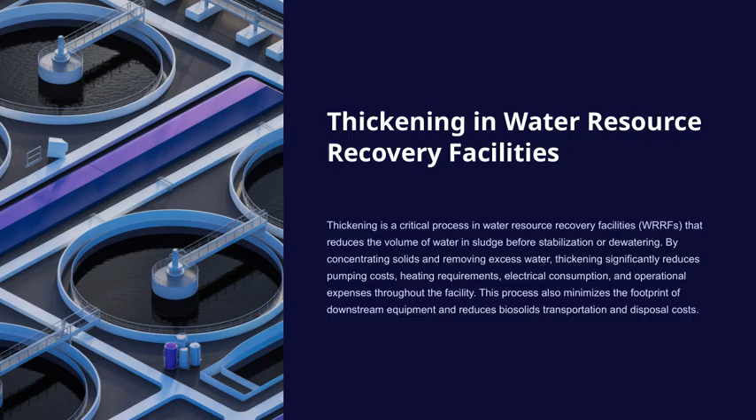So let's get started. Let's talk about why thickening really matters in our processes. First, when we increase the solids content in sludge from 2% to 8%, we can reduce the overall sludge volume by about 75%. This is a huge difference, and it translates directly into lower operational costs. You'll see savings across many parts of the facility, including heating, pumping, and chemical treatment systems.

Now, on the process efficiency side, thickening helps us by reducing the water content before downstream steps like anaerobic digestion. With less water to handle, we need smaller equipment and less energy to operate it. This not only makes our facilities more sustainable, but also more cost-effective in the long run. So overall, thickening is a key step that impacts both costs and efficiency, helping us optimize our operations while supporting our sustainability goals.

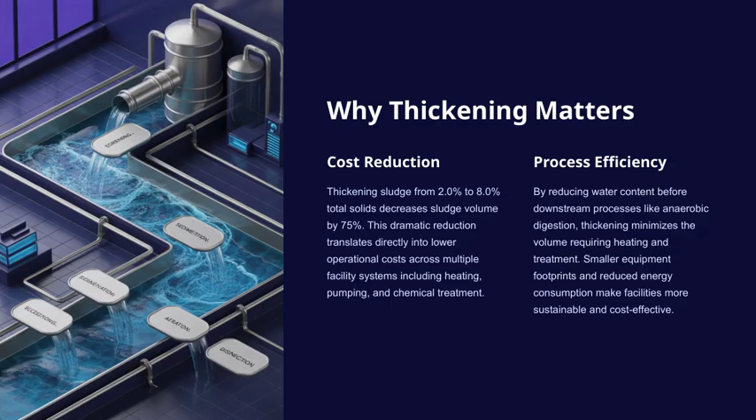Now, let's take a closer look at the different thickening technologies available and how they fit into the overall sludge management process. First up, we have gravity thickeners. These rely on a simple physical settling process, and they can typically achieve total solids concentrations of about 2 to 15%. They're particularly effective for primary sludge and lime-conditioned solids. One of the key advantages here is their straightforward operation and lower cost, though they do require a larger footprint compared to some other options.

Next, we have dissolved air flotation, or DAF. This technology uses tiny air bubbles to float solids to the surface, reaching about 3.5 to 8% total solids. It's especially good for waste-activated sludge and aerobically digested solids because of its excellent capture rates. The ability to separate solids efficiently makes it a popular choice in many treatment plants.

Moving on, there's the gravity belt thickener. This process uses a polymer conditioning step, and the sludge drains through a porous belt, achieving total solids levels between 4 and 10%. It's known for its compact design, making it suitable for space-constrained facilities, and it offers high reliability with capture rates exceeding 95%.

Then we have rotary drum thickeners. These feature a rotating perforated drum with internal flights, which helps concentrate solids to about 5 to 12% total solids. They are quite space-efficient and are ideal for waste-activated sludge, especially when lower energy consumption is a priority.

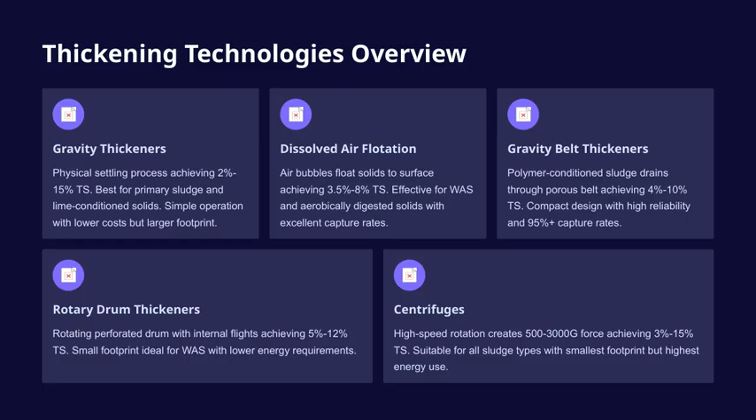In summary, understanding these different thickening options helps us choose the right technology based on space, cost, energy use, and the specific sludge characteristics we're dealing with, an essential part of designing an efficient and effective treatment process.

Gravity thickeners are actually one of the oldest and simplest technologies we use for thickening sludge. They come in circular or rectangular shapes and work similarly to clarifiers. Essentially, solids naturally settle to the bottom of these tanks, while the clearer water, or supernatant, flows over weirs at the top. Now, how do they operate?

Sludge enters through a central feed well, which is designed to distribute the flow evenly and reduce turbulence. This even distribution is key to efficient settling. Inside the tank, solids settle by gravity onto a sloped floor, typically with a pitch between 2 to 3 to 12. As the sludge collects, slow-moving scrapers or plows gently push it toward a central hopper. From there, the sludge is pumped out for further treatment.

An important feature is the collector mechanism, which has pickets that gently agitate the sludge blanket. This helps release any trapped gas bubbles, which could otherwise cause bulking and disrupt the process. For primary sludge, the thickening typically results in a solids concentration of about 5 to 10% total solids. When we combine primary and secondary sludge, the concentration tends to be lower, but still effective for our purposes.

Let's touch on some key design parameters. These tanks usually have a depth of about 3 to 4 meters, or around 10 to 13 feet. The diameter can be quite large, up to 25 meters, about 82 feet, especially for bigger plants.

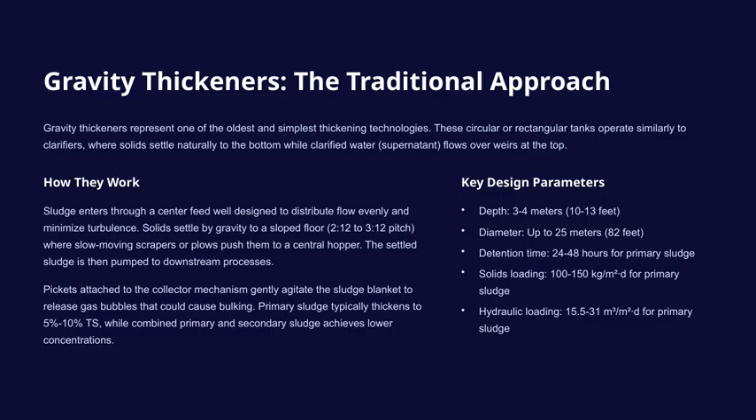All these parameters help ensure the thickener operates efficiently, producing a sludge that's thick enough for downstream processes, while maintaining stable and reliable operation. Let's take a closer look at the factors that influence the performance of gravity thickeners.

First, sludge characteristics are really important. Fresh primary sludge tends to thicken more effectively than aged or combined sludges. The key here is the nature and freshness of the solids, which significantly impact how quickly they settle and the final concentration we can achieve.

Next, temperature effects play a crucial role. When temperatures are higher, there's a greater risk of septic conditions and odors developing. On the other hand, lower temperatures increase water viscosity, which slows down the settling velocities and means we need longer detention times to get the desired thickening.

Now let's talk about loading rates. It's critical to maintain the design solids and hydraulic loading rates. Overloading the system can lead to rapid sludge buildup, potential septic conditions, and carryover of solids into the supernatant, which we definitely want to avoid.

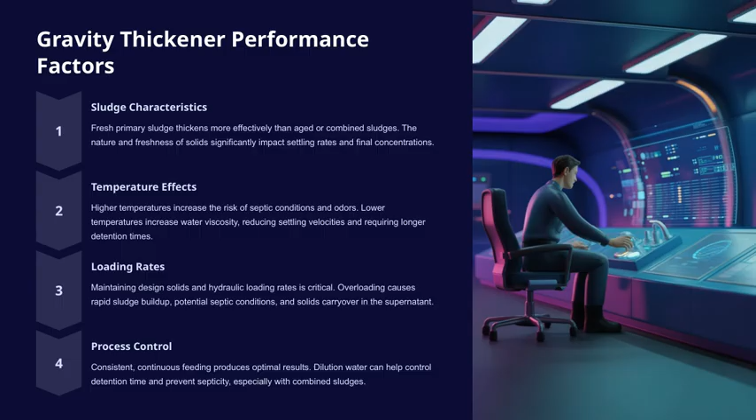Finally, process control is key. Consistent, continuous feeding helps us achieve optimal results. Sometimes, using dilution water can be beneficial. It helps control detention time and prevent septicity, especially when working with combined sludges. All these factors are interconnected and essential for maximizing the efficiency and effectiveness of our gravity thickeners.

Now let's look at how dissolved air flotation thickeners, or DAFTs, operate. Essentially, they use compressed air to change the specific gravity of solids, making them float to the surface.

The process begins by dissolving air into recycled water under pressure, typically between 40 and 80 psi, in a saturation tank. When this pressurized mixture enters the DAFT at atmospheric pressure, tiny bubbles, less than 100 micrometers in size, are released and attach themselves to the solid's particles.

This attachment causes the solids to become buoyant and float to the surface, forming a layer that's usually about 200 to 610 millimeters deep. That float layer is then skimmed off the top. Meanwhile, the heavier solids settle to the bottom and are removed as underflow. Both of these streams are collected and removed by conveyors.

Looking at performance characteristics, the float solids typically contain about 3.5 to 4% total solids, while the underflow solids range from 3 to 8%. The recycle rate can be quite high, between 100 and 200% of the influent flow, which helps maintain efficiency. Without using polymers, the capture rate of solids is around 95%, which is quite effective.

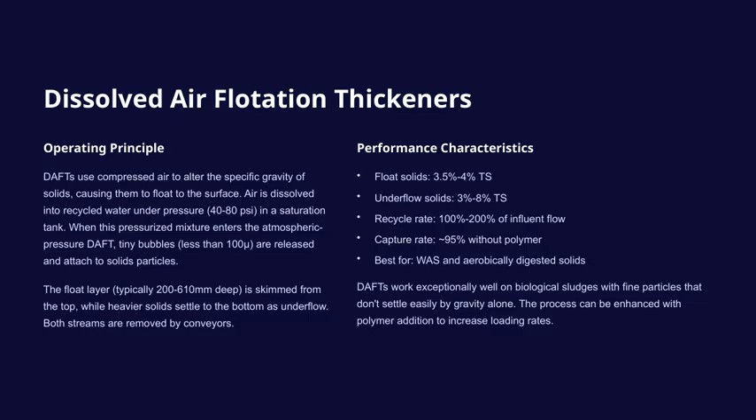DAFTs are particularly well suited for thickening waste-activated sludge and aerobically digested solids. They excel at handling biological sludges with very fine particles that don't settle easily through gravity alone. And of course, the process can be enhanced further by adding polymers, which increase the loading rates and improve overall performance. So, in the context of our overall treatment process, DAFTs offer a reliable, efficient method for thickening biological sludge, especially when dealing with fine particles that are challenging to settle naturally.

Now, let's look at how the DAFT operation and control work. First, air saturation occurs in the saturation tank, where compressed air dissolves into the recirculation water at pressures between 40 and 80 psi. Achieving the right pressure is crucial because it creates optimal bubble sizes, which are essential for effective flotation.

Next is bubble formation. When this pressurized water enters the atmospheric part of the DAFT, the pressure drops and tiny bubbles form. The size of these bubbles, ideally around 50 micrometers, is a key factor because it influences how well solids can attach and be floated.

Moving on to solids flotation, these tiny bubbles attach themselves to solids particles, reducing their overall density below 1. This causes the particles to rise to the surface, forming a float that can easily be removed.

Then we come to collection. The float at the surface is removed by top skimmers, while bottom scrapers collect any settled solids. The clearer water, or subnatant, is then returned to the headworks of the facility for further treatment or reuse.

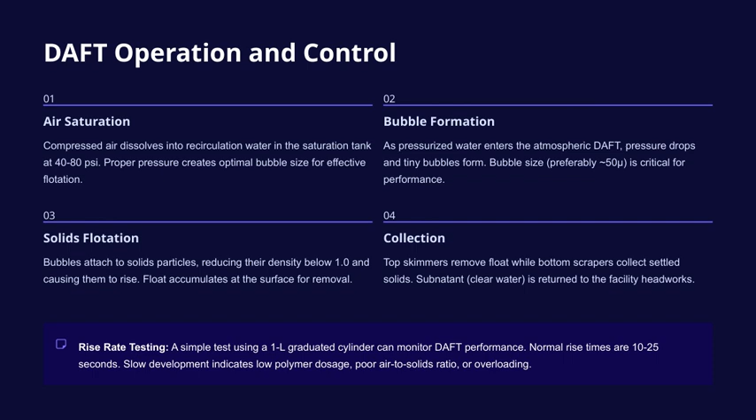Finally, there's a simple rise rate test using a 1-liter graduated cylinder. This test helps us monitor how well the DAFT is performing. Normally, rise times should be between 10 and 25 seconds. If the rise is slow, it might indicate issues like low polymer dosage, an improper air-to-solids ratio, or overloading the system. Keeping these parameters in check ensures optimal operation and treatment efficiency.

Gravity belt thickeners, or GBTs, are a real game changer in thickening technology. They are designed to be compact yet highly efficient, making them ideal for space-constrained setups. These units work by removing free water from polymer-conditioned sludge as it moves across a porous, moving belt, which is quite innovative.

Now, let's walk through the process flow. First, polymer is injected into the sludge feed line through a high-energy mixing zone, usually using an inline variable orifice mixer. This ensures thorough mixing and proper conditioning of the sludge.

Next, the conditioned sludge flows into a flocculation tank, where it stays for about a minute. This detention time allows for proper floc formation, which is critical for effective thickening. From there, the sludge overflows onto the moving belt.

As it travels, chicanes or plows gently turn the sludge, encouraging trapped water to drain through the clear sections of the porous belt. At the discharge end, there's an adjustable ramp that provides extra dewatering time, making the process even more efficient.

Looking at the key components, you'll notice the flocculation tank with a slow-speed mixer, which helps with floc formation. The porous woven polyester belt is central to the process, allowing water to drain through it. Chicanes facilitate gentle agitation, preventing sludge breakup.

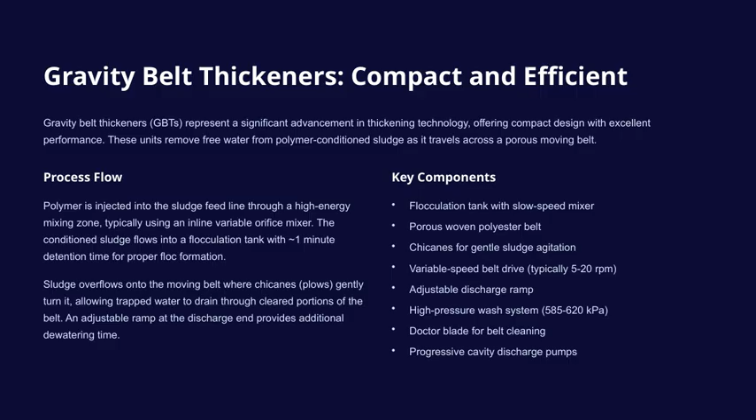Let's take a closer look at GBT performance and the control variables that influence it. First, polymer conditioning is absolutely critical. The type of polymer you choose and the dosage you apply can make a big difference.

For example, doses typically range from about 1.5 grams per kilogram, which is roughly 3 pounds per dry ton, for raw primary sludge, up to 6 grams per kilogram, or around 12 pounds per dry ton, for sludge that has been anaerobically digested. To determine the best polymer type and dosage, proper jar testing is essential. This helps us find the optimal conditions for effective flocculation.

Next, let's talk about mixing energy. The inline mixer creates turbulence that disperses the polymer evenly throughout the sludge. The key here is adjusting the orifice opening to control the mixing intensity. If the mixing is too gentle, we risk poor floc formation. If it's too aggressive, we might shear the polymer chains, reducing their effectiveness. Balancing this is crucial for optimal results.

Moving on to belt speed, slower speeds increase the retention time, which allows for better thickening of the solids. They also help concentrate the solids more effectively. But if we speed up the belt, we increase throughput, which is good for productivity. However, faster speeds can sometimes reduce the dryness of the final cake, so operators need to find that sweet spot, balancing speed with feed rate to achieve the best performance.

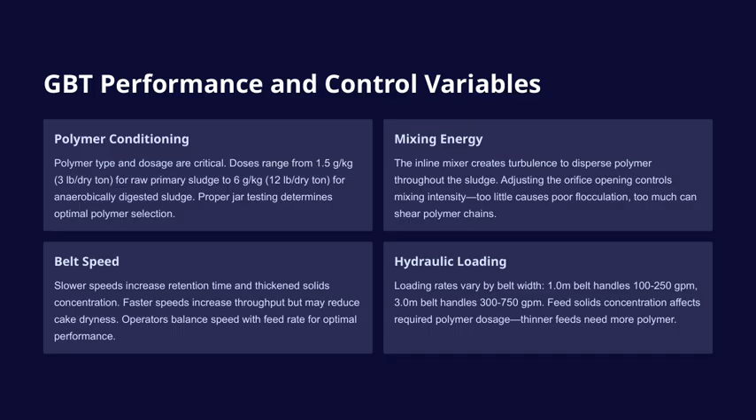All these variables, polymer conditioning, mixing energy, belt speed, and hydraulic loading, are interconnected. Managing them carefully helps us optimize the GBT process, ensuring efficient operation and high-quality outputs.

Let's talk about the GBT solids loading and capture rates. When it comes to loading, we typically see a minimum of around a few kilograms per meter per hour, and the maximum can go quite a bit higher depending on the operation. Now, what's really impressive is that GBTs consistently achieve solids capture rates of over 95% when they are properly operated. That's a key point because it highlights the efficiency of this technology.

The concentration of thickened sludge usually falls between 4% and 10% total solids, or TS. Meanwhile, the feed solids, meaning the solids going into the system, range from about 0.4% up to 8% TS. This variation is important because it affects how well the system performs. Performance, of course, depends on several factors. The characteristics of the sludge itself play a role, as does the effectiveness of the polymers used.

Operational adjustments, things like belt speed, ramp angle, and mixing energy, are critical for optimizing the process. Connecting this to our overall theme, understanding these loading and capture rates helps us optimize systems for maximum efficiency, ensuring we meet our treatment goals effectively and reliably.

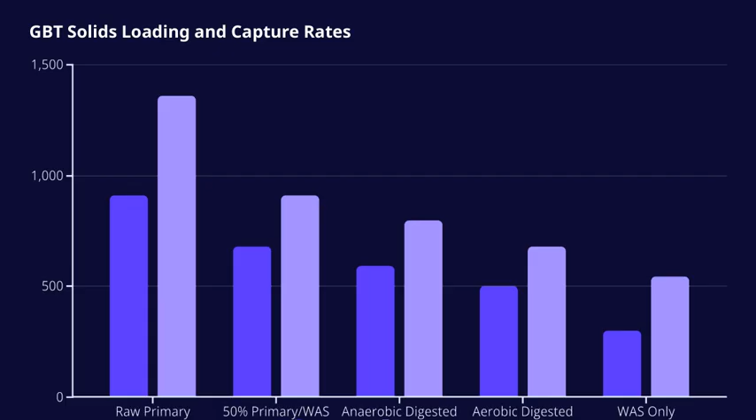Let's take a closer look at rotary drum thickeners and their compact design. These units are a great space-saving option for sludge thickening, especially when dealing with waste-activated sludge, or WAS. The key feature is the rotating perforated drum, which typically spins between 5 and 20 revolutions per minute. Inside, you'll find internal flights or screw conveyors that work to move the conditioned sludge along the length of the drum. Now, how does it operate?

Polymer-conditioned sludge is fed into a flocculation tank just before reaching the drum. The rotating drum then lifts the sludge up along its sides. When the sludge reaches the top, it falls back down, and during this process, free water is able to drain through the perforations into a collection trough beneath. Meanwhile, the internal flights are constantly pushing the sludge towards the discharge end, ensuring continuous movement.

Looking at performance specs, these units can handle feed capacities of up to 180 cubic meters per day for larger models. They typically produce a thickened solids concentration ranging from 5 to 12% total solids, and for WAS, the feed concentration is usually between 0.5 and 1% TS. The capture rate is quite high, between 93 and 99%, meaning most of the solids are retained. The polymer dose varies from 2 to 7 grams per kilogram, depending on the sludge type, and the drums are made from durable materials like stainless steel wedgewire, perforated plates, or polyester fabric.

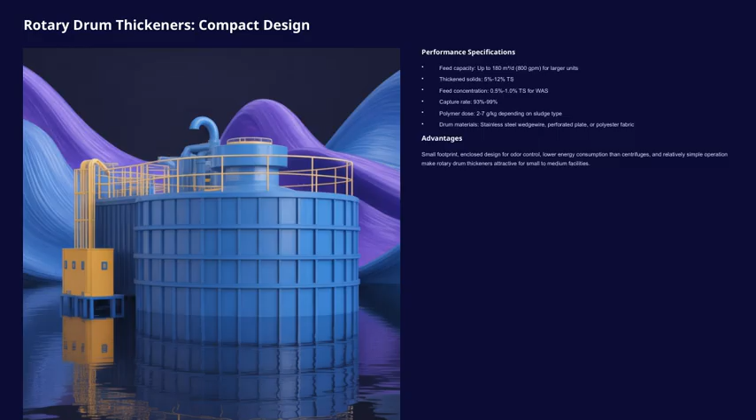Now, let's talk about centrifuge thickening and the maximum force it can generate. Centrifuges use rotational acceleration to create incredibly high forces, ranging from 500 to 3,000 times Earth's gravity. This intense force dramatically speeds up the separation process, allowing solids to be separated from water very efficiently. Typically, these machines operate at speeds between 1,000 and 3,000 RPM, which enables them to thicken all types of sludge to concentrations between 3 and 15% total solids.

Next, let's look at how the feed enters the centrifuge. Conditioned sludge is introduced through a stationary feed tube into the center of a rotating bowl via an inlet distributor. This setup ensures a smooth and controlled entry, setting the stage for effective separation. Once inside, the high-speed rotation causes the denser solids to be pushed outward toward the bowl wall, while the lighter water remains closer to the center. This centrifugal force creates a rapid and clear separation of solids from water.

Moving on to solids conveyance, there's a scroll conveyor inside the bowl. It rotates slightly slower than the bowl itself and scrapes or conveys the solids from the wall toward the discharge end, which is conical in shape. This movement ensures the solids are effectively moved out of the separation zone. Finally, the clarified water flows over adjustable weirs at the opposite end of the centrifuge. By adjusting the weir height, we can control the pond depth and, consequently, the amount of water discharged. This entire process highlights how centrifuges efficiently separate solids from water, contributing to effective sludge management.

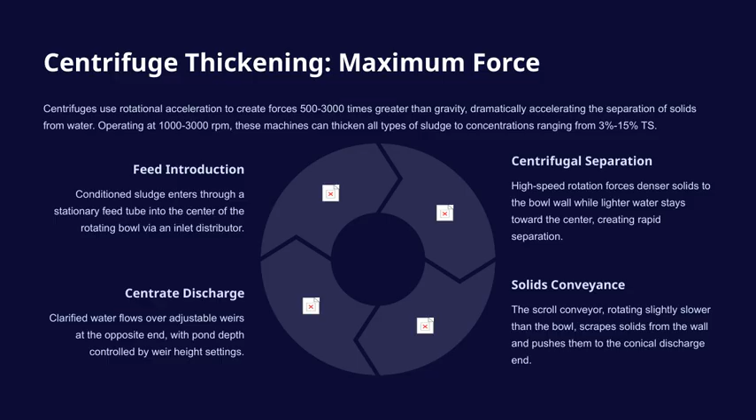Let's take a closer look at the centrifuge process variables that are crucial for optimal operation. First up is bowl speed. This is set during commissioning, and it determines the G-force applied during separation. Higher speeds generate more force, which can enhance solid separation, but it may also reduce the dryness of the resulting cake. Typically, we're looking at speeds between 2,000 and 3,000 RPM, which produce G-forces ranging from about 500 to 3,000.

Next, we have differential speed, which is the difference in RPM between the bowl and the scroll. This setting controls how long solids stay in the centrifuge. Longer retention times usually mean a drier cake, so lower differential speeds, say between 1 and 20 RPM, give us that longer retention. Conversely, higher differential speeds make the solids discharge faster, which results in a wetter cake but can improve throughput. Then there's pond depth, which is managed through the weir height. Pond depth influences the size of the clarification zone and the quality of the centrate.

A deeper pond generally helps improve the clarity of the centrate, but it can also lead to a wetter cake, so there's a balance to strike here.

Moving on to the target thickened solids, we usually aim for about 5 to 6% concentration. This level ensures we maintain pumpability for downstream processes, which is critical for smooth operation.

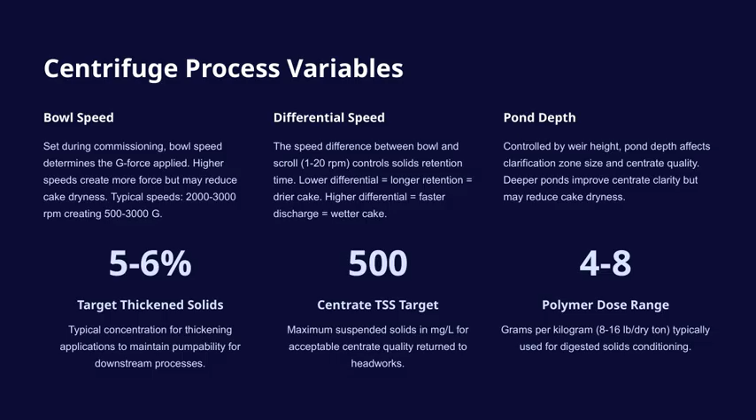Polymers are key conditioning chemicals that play a crucial role in improving both thickening and dewatering processes. They do this by making solids particles coagulate and form larger, more manageable flocs. These large molecules, which have high molecular weights, act as both coagulants, which destabilize colloidal suspensions, and flocculants, which bridge particles together into bigger masses that are easier to separate from water.

Now, why do polymers work so well? Wastewater sludge particles, especially in waste-activated sludge, carry negative electrical charges. These charges cause the particles to repel each other, keeping them suspended and stable.

Cationic, or positively charged, polymers come into play here. They neutralize these negative charges, allowing the particles to come closer together. Once neutralized, the long polymer chains can bridge between particles, helping form large flocs that settle or separate more easily from the water.

It's important to note that primary sludge has weaker negative charges and tends to settle more readily, so it often requires less or no polymer. In contrast, waste-activated sludge has stronger negative charges and smaller particles, making the use of polymers essential for effective thickening and dewatering.

Let's also talk about some key characteristics of polymers. They can carry different charges: cationic, anionic, or non-ionic, depending on their application. The charge density indicates how many charged sites are along the polymer chain, which affects how well it interacts with sludge particles.

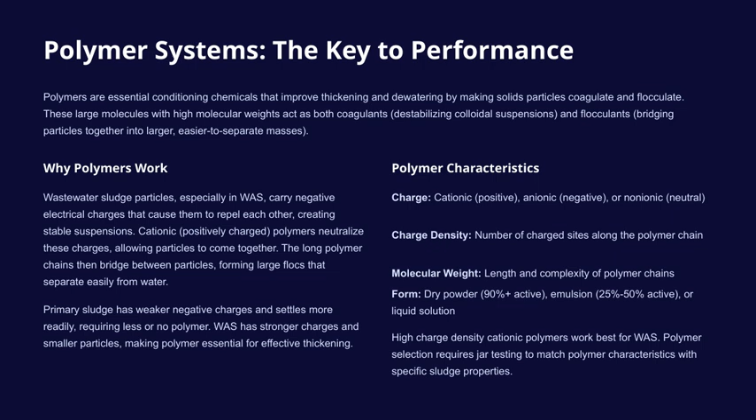For waste-activated sludge, high-charge density cationic polymers tend to be the most effective. And of course, selecting the right polymer involves jar testing. This is where we match the polymer characteristics with the specific properties of the sludge to ensure optimal performance.

Let's take a closer look at dry polymer systems. First, we have the dry polymer feed. This involves volumetric feeders such as screws, augers, vibrating units, or discs that sprinkle individual polymer grains into the wetting zone at carefully controlled rates. Proper calibration here is crucial because it ensures accurate dosing, which is essential for maintaining consistent polymer performance.

Next is the initial wetting stage. This is a critical step because each particle must be fully wetted to prevent issues downstream. Washdown water creates a smooth flow over the funnel surfaces, immediately transporting these particles into the mixing zone. Ensuring thorough wetting at this stage helps avoid problems later on.

Then we move into high-energy mixing. Eductors use water pressure, typically between 200 and 400 kilopascals, to generate a high-velocity flow. They leverage the Venturi effect, providing intense mixing that saturates the polymer particles and begins the process of uncoiling the polymer chains. This step is vital for activating the polymer effectively.

Following that, we have the aging tank. Here, the mixture is gently mechanically stirred at speeds up to 500 RPM for anywhere from 30 minutes to 2 hours. This allows complete polymer activation, and proper aging ensures that the polymer is fully ready for use, maximizing its effectiveness in the process.

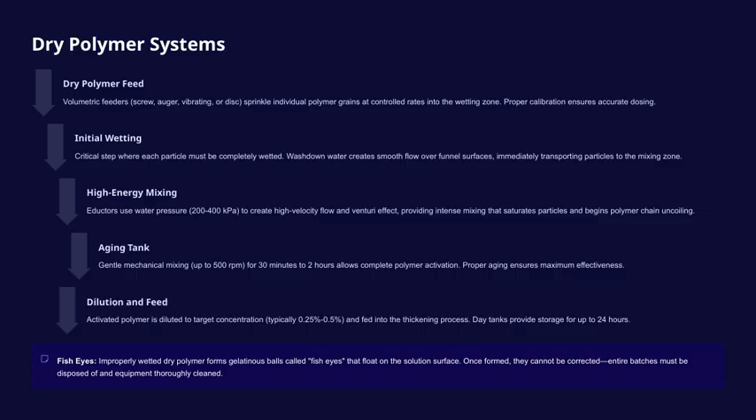Let's take a closer look at emulsion polymer systems and how they work. These systems inject neat polymer, typically between 25 and 50% active content, into a high-velocity water stream. The energy from mixing then breaks the emulsion and starts the process of polymer activation. This setup can feed directly into the process or include aging tanks, also known as day tanks, which provide additional time for activation and operational flexibility.

The critical equipment involved includes a storage tank for the neat polymer, which should have gentle mixing to keep the polymer uniform. We also need a precision metering pump to control the polymer flow accurately, and a polymer injection point equipped with a check valve to prevent backflow. For mixing, a high-energy chamber or eductor is used to ensure effective dispersion, and sometimes an optional mechanical mixer provides extra energy if needed. The system also requires a dilution water supply, typically under 200 to 400 kilopascals of pressure, and a day tank to store the activated solution for later use.

One major advantage of emulsion polymers over dry systems is that they are much easier to make up properly. This reduces the risk of wasting batches and eliminates dust hazards during handling. The liquid form also avoids issues related to moisture exposure during storage. Although emulsion polymers tend to be more expensive per pound than dry powders, the higher success rate in proper makeup often makes them more cost-effective overall.

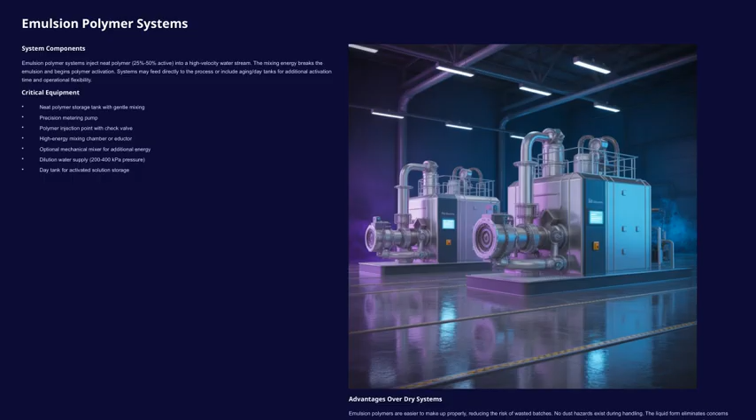In summary, emulsion polymer systems offer a flexible, easier-to-handle alternative to dry powders, but they do require attentive maintenance of key components like the check valve. Understanding these aspects helps us optimize performance and minimize operational issues.

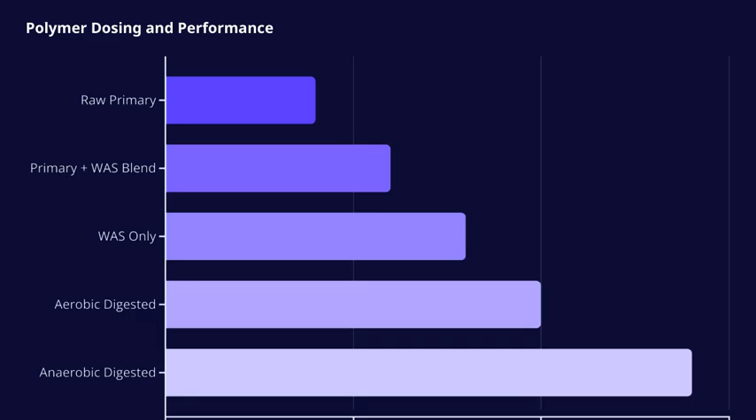One key point I want to emphasize is the importance of regular jar testing. These tests are vital for optimizing both polymer selection and dosing. Since sludge characteristics can change due to seasons, influent variations, and process modifications, it's crucial to test consistently. Ideally, testing should be done weekly or whenever you notice performance issues. This approach helps ensure you're using the most cost-effective polymer while still achieving target capture rates above 95%. Ultimately, maintaining proper dosing not only improves treatment efficiency, but also helps control operational costs.

Let's discuss process control and optimization, starting with hydraulic loading rate. It's crucial to monitor flow rates continuously to make sure they stay within the design parameters. We calculate the hydraulic loading rate, or HLR, by dividing the flow by the surface area. If the HLR exceeds the designed limit, it can lead to poor solids separation and solids carryover in the filtrate or centrate, which we definitely want to avoid.

Next is solids loading rate. This measures the mass of dry solids per unit area per unit time. Interestingly, SLR often limits throughput more than HLR does. To calculate it, we multiply the flow rate by the solid's concentration and then divide by the surface area. Keeping an eye on SLR helps us prevent overloading the system.

Moving on to capture rate analysis. This tells us what percentage of influent solids are actually being captured in the thickened sludge. Our target is over 95% capture. If the capture rate drops, it can indicate issues like polymer problems, overloading, or mechanical failures, all of which need immediate attention to keep our process running smoothly.

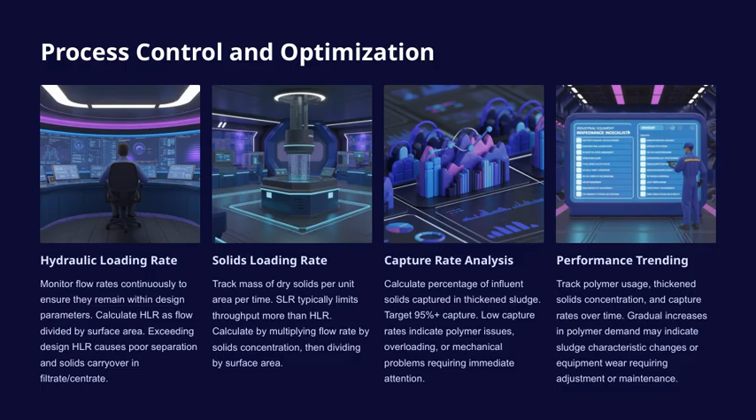Finally, performance trending is essential. We track variables like polymer usage, solids concentration, and capture rates over time. If we notice a gradual increase in polymer demand, it might point to changes in sludge characteristics or equipment wear. Recognizing these trends early allows us to make necessary adjustments or maintenance before more serious problems develop. All these controls are interconnected and are vital for optimizing our process efficiency and ensuring quality outcomes.

Let's talk about some safety and operational best practices that are crucial for our success and safety.

First, safety considerations. Slip and fall prevention is key because polymer surfaces can become extremely slippery. Always use absorbent granular powders, not water, to clean spills, and keep walkways clean and dry to prevent accidents. When it comes to lockout and tagout procedures, it's essential to follow the proper steps before doing maintenance on rotating equipment. Never bypass safety interlocks.

That's a critical safeguard. For confined space entry, like when working in thickener tanks, proper atmospheric testing is a must because gases like hydrogen sulfide can be present. Always adhere to strict entry procedures to keep everyone safe.

Personal protective equipment is your frontline defense. Wear respiratory protection when handling dry polymers, and use gloves and eye protection around all polymer systems to prevent exposure. When working around moving equipment, make sure loose clothing, jewelry, and hair are secured away from rotating machinery, and ensure all guards are in place during operation.

Now, moving into operational excellence. Regular monitoring is vital. Check your equipment at least once per shift. This includes pumps, mixers, collectors, and wash systems to ensure everything is running smoothly.

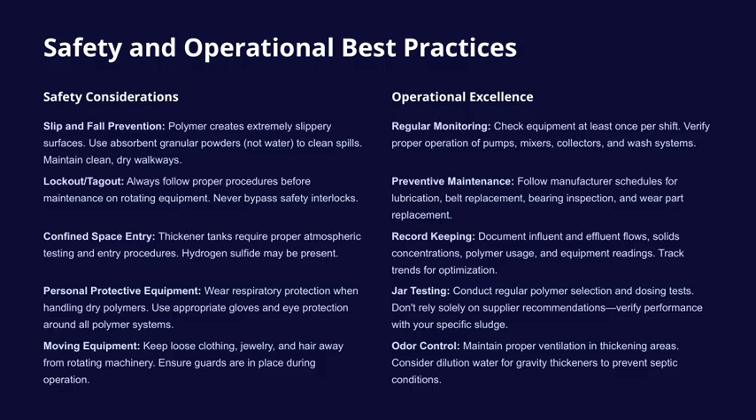Lastly, odor control shouldn't be overlooked. Maintaining proper ventilation in thickening areas is necessary, and using dilution water in gravity thickeners can help prevent septic conditions. By following these best practices, we not only ensure safety, but also optimize our operations for better efficiency and compliance.

Thickening is really the foundation for effective solids management in water resource recovery facilities. It acts as a critical bridge between the initial liquid treatment steps and the final solids processing. By reducing the sludge volume by anywhere from 50 to 75% before it moves on, thickening not only cuts down on operational costs, but also helps improve the overall performance of the facility.

When it comes to choosing the right thickening technology, it's important to consider factors like the type of sludge you're dealing with, the space available, how complex you're willing to handle operations, and your budget. For example, gravity thickeners are great for primary sludge because they're simple to operate. If you're working with waste-activated sludge, technologies like gravity belt thickeners or rotary drums can offer compact and reliable performance. And if you need maximum flexibility with a small footprint, centrifuges are often the best choice.

Polymer optimization is another key point. Selecting the right polymer and dosing it correctly can significantly influence your operational costs and the effectiveness of the process. Regular jar testing, proper system maintenance, and ensuring the makeup water quality are all essential practices. When done well, they can help you achieve capture rates of over 95%, which is a real game changer for efficiency. Process integration is also vital.

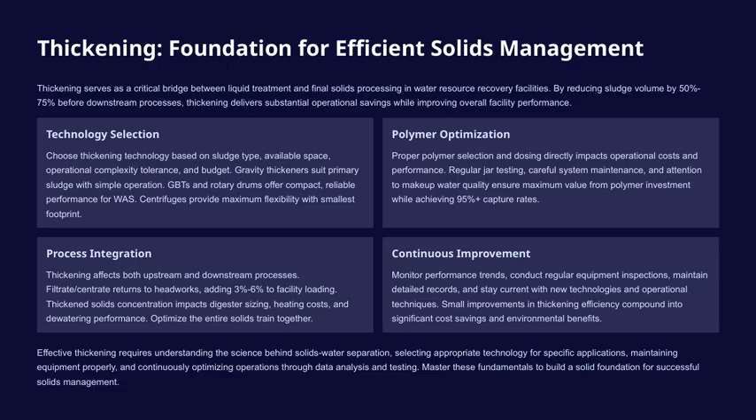Remember, effective thickening really comes down to understanding the science of solids-water separation, choosing the right technology, maintaining your equipment properly, and always looking for ways to optimize through data analysis and testing. Master these fundamentals, and you'll build a solid foundation for successful solids management across your facility.